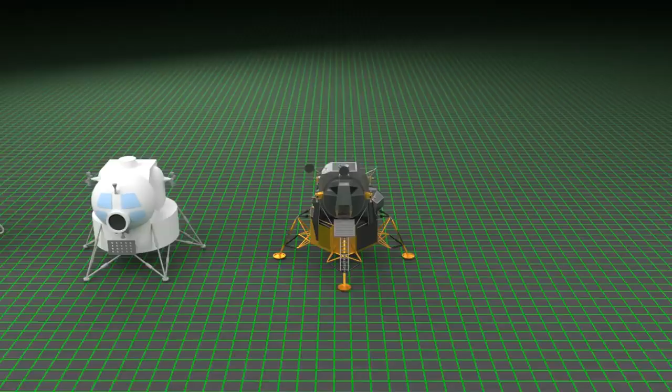The year 2019 marks the 50th anniversary of the Apollo 11 moon landing. Let's celebrate by using 3D animation to show the inside of the Apollo Lunar Module. Let's check it out.

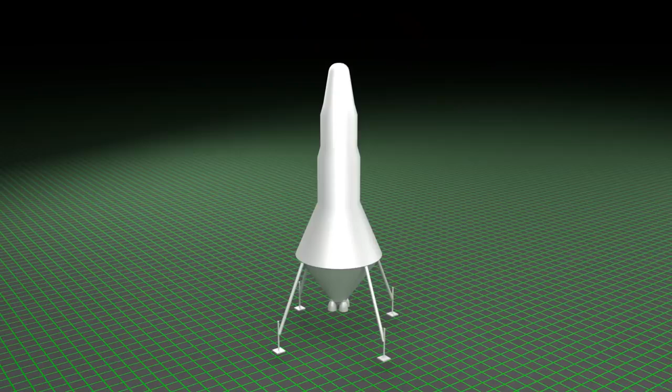Alright, so we're going to land on the moon. What should our landing vehicle look like? Early artwork got their ideas from science fiction. Then we started building prototypes. This one had 5 legs. Our astronauts will want to see outside, so let's make a cockpit with some windows.

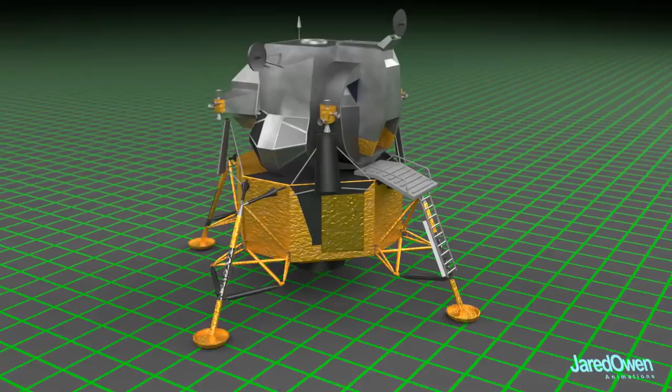The final design has only 4 legs and the windows are much smaller to save weight. It was about 23 feet tall. For comparison, here's the size of a person. The LEM was designed and built in Bethpage, New York by the Grumman Corporation. It took hundreds of engineers and most of the 1960s to complete.

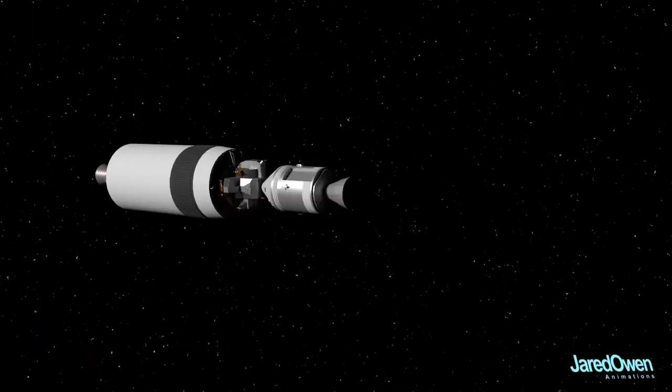It was originally called the Lunar Excursion Module, or just LEM. Eventually, the word excursion was dropped from the acronym, but everyone still pronounced it the same, LEM. It was a long process to get this machine all the way to the surface of the moon. It was launched aboard the Saturn V rocket, and then went to the moon along with the service module and command module. These 3 parts together are what we call the Apollo spacecraft.

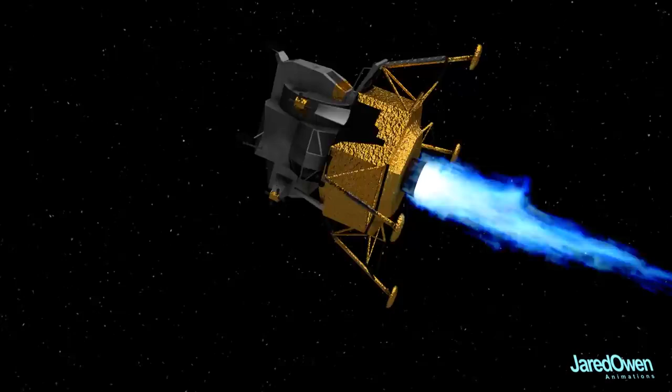The LEM was the only part that goes down to the surface of the moon. It was the first spacecraft designed to only operate in the vacuum of space. So for example, the command module needed to be really aerodynamic for the launch through the Earth's atmosphere. The LEM wasn't exposed until it was in outer space. Since there's no air up here, the outline really doesn't matter. This is part of why you get a spacecraft that looks unlike anything we've seen before.

Starting with the famous Apollo 11, there were a total of 6 moon landings covering a span of about 3 years. Apollo 13 had an accident in space and was forced to come home early without landing on the moon. Earlier missions tested the lunar module in Earth orbit, and then once in lunar orbit without actually landing on the moon. More Apollo missions were planned, but were cancelled due to budget cuts.

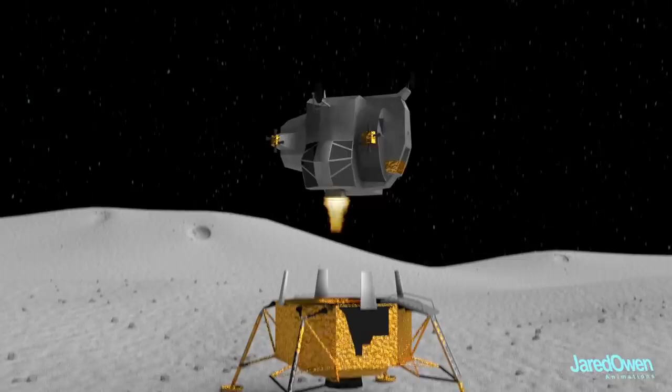The LEM was split up into 2 parts, the ascent stage and the descent stage. For the landing, both parts went to the surface of the moon. When it's time to leave, only the ascent stage leaves the surface, which means that each of the Apollo moon landings left behind a descent stage. Let's zoom in for a closer look.

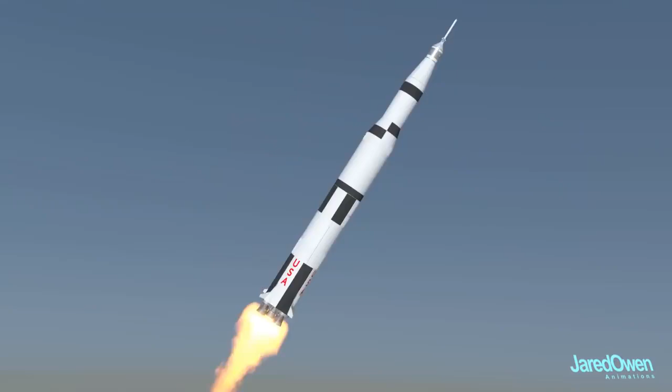There were 4 legs attached to the side. These were originally in the retracted position so that the LEM would fit into the Saturn V for launch. Then, once they are getting ready to land, the legs are extended. 3 of the legs contained a contact sensing probe, which told the astronauts that they were close enough to the surface to shut off the descent engine.

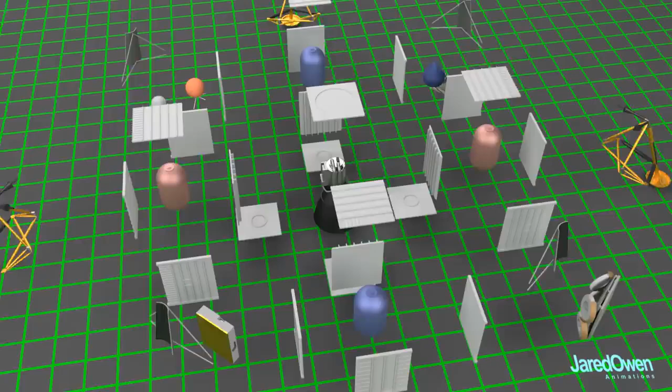This leg has the ladder, which the astronauts can climb down. On the left side of the ladder, there's a container which holds the American flag. The shape of the descent stage is somewhat of an octagon. Here's what the structure looks like underneath. Inside, there were 5 box-shaped compartments. The center one contained the descent engine which was used for landing on the moon.

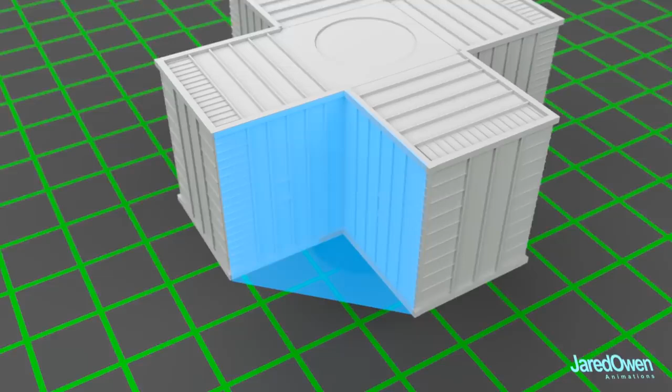In order to light this engine up, we'll need 2 oxidizer tanks and 2 fuel tanks. They both feed right into the engine. This gives us the propulsion we'll need to safely land on the moon. These outer areas are where they stored more equipment. They called them quadrants, so this was quadrant 1, 2, 3, and 4.

Quadrant 1 was for general storage. For the last 3 Apollo missions, there was the lunar roving vehicle packed inside of here. Once on the surface, it was unpacked and ready for use. This allowed them to explore much further from the lunar module.

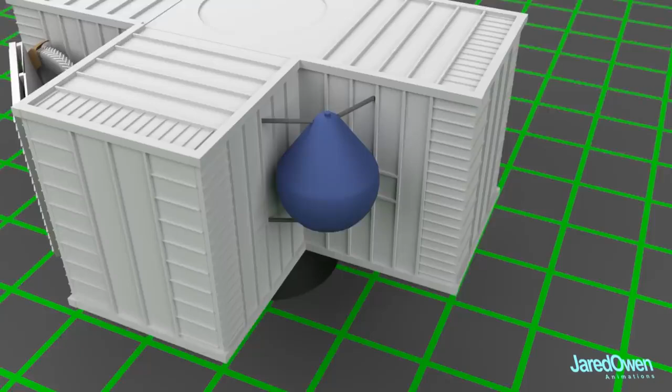Quadrant 2 contained a water tank, and then below here was the Apollo Lunar Surface Experiments Package, or ALSEP, which basically contains several science experiments for them to perform. Quadrant 3 had another helium tank, oxygen tank, and on a few missions it carried retroreflectors, which is a special kind of mirror. They were left behind on the surface of the moon, and they allow scientists even today to bounce laser light from the Earth to the moon and back.

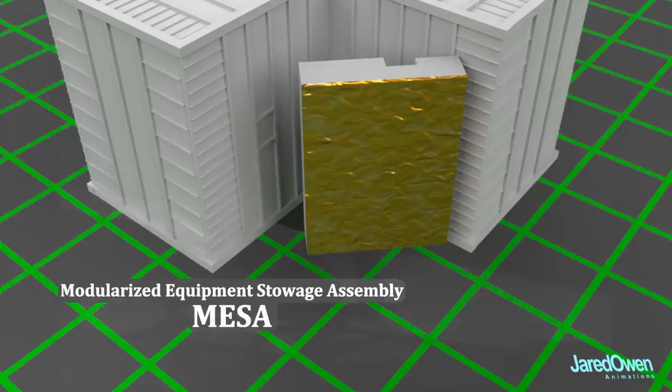Quadrant 4 contained the Modularized Equipment Stowage Assembly, or MESA. And if you've ever wondered how we recorded those first few steps on the moon, there's a camera here that points right towards the ladder. The landing legs were attached on the main structure.

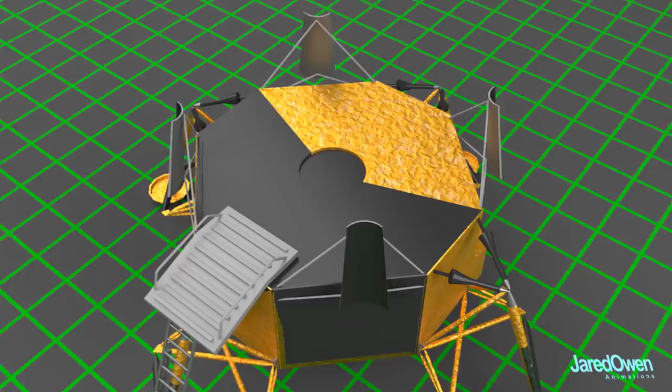The covering on the outside was made out of mylar, which looks like gold tinfoil. They used it because it was lightweight, and it made sure that the inside temperature didn't get too hot or too cold. This is the platform that leads to the ladder, and these are the plume deflectors. They protected the spacecraft from the thrusters on the ascent stage. We'll talk about that later in the video.

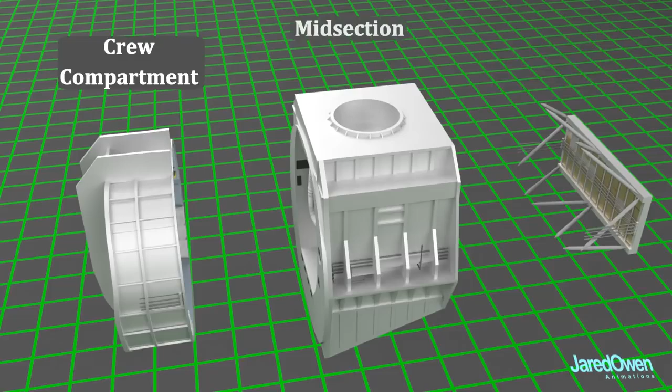Okay, let's take a look at the ascent stage now. If we remove the cover, you can see some of the machinery underneath. Let's start with the main structure. This is the crew compartment, the midsection, and the aft equipment bay. Both the crew compartment and the midsection were normally pressurized, which means that they can safely take off their spacesuits.

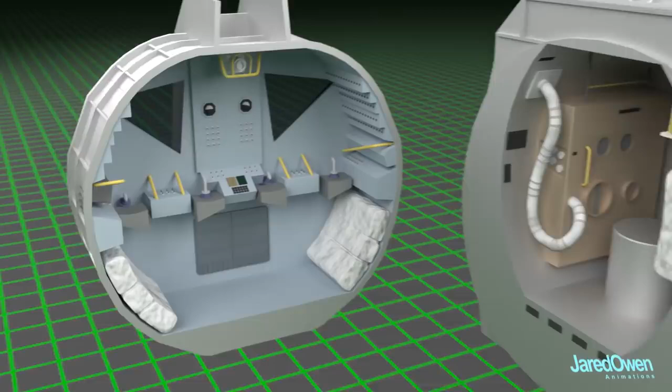The crew compartment didn't have a lot of room. Controls were mostly in the front, and then there's 2 windows to look outside at the surface of the moon. The commander was on the left and the LEM pilot was on the right. Remember that the third astronaut was still orbiting the moon in the CSM. After landing, this hatch is for the astronauts to leave the cabin and start their climb down the ladder.

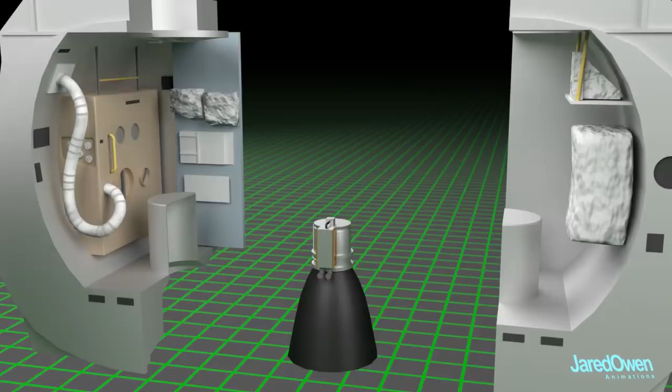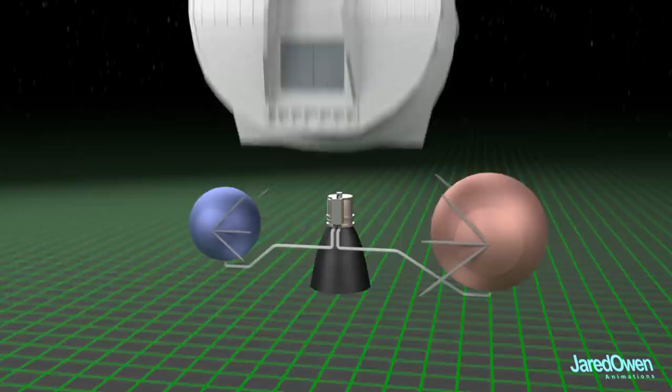In the midsection, you'll find more equipment, and this cover, which protected the ascent engine. And of course, the tunnel to dock with the command module, once back in lunar orbit. The aft equipment bay has more oxygen and helium tanks, as well as other electronics for the LEM. There's a fuel tank here and a smaller oxidizer tank here. This is the reason that we have these bulges on the side here. Both of these tanks feed right into the ascent engine, which was used to blast off the surface of the moon.

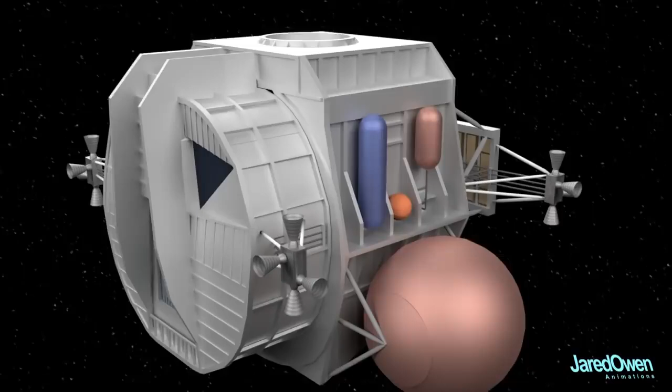On the outside is the Reaction Control System, or RCS. It's an arrangement of 16 thrusters in groups of 4. It was powered by fuel and oxidizer tanks on the side here. During the flight, these thrusters could be used to maneuver the LEM. The plume deflectors help redirect the exhaust to protect the descent stage. On the outside were several antennas to let them communicate with mission control back on Earth.

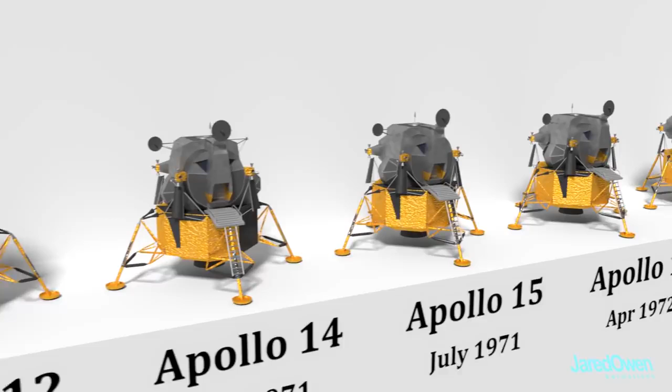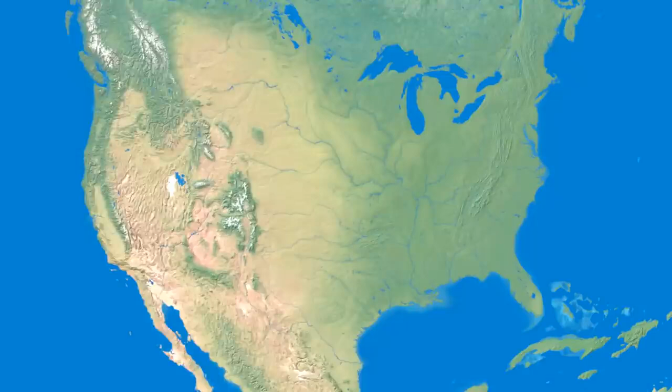So much effort went into building each lunar module. What's sad here is that they could only be used once. Most of the descent stages are peacefully sitting on the moon, and most of the ascent stages crashed into the moon after they were discarded in lunar orbit. A few lunar modules never got the chance to fly in space. They are now located in museums along the east coast of the United States.